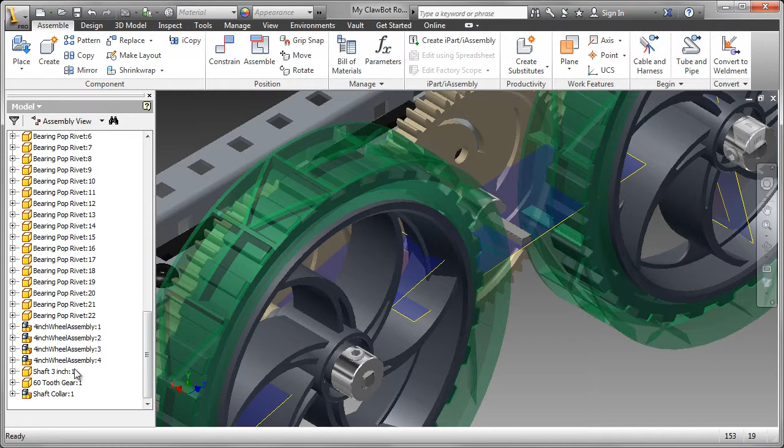Now the drivetrain is in place, I'm going to go ahead and align the gears. One of the first things I want to do, however, is just double check that the gears align properly. So I'm just going to look down in the top view, and that looks pretty good. All the gears are aligned correctly.

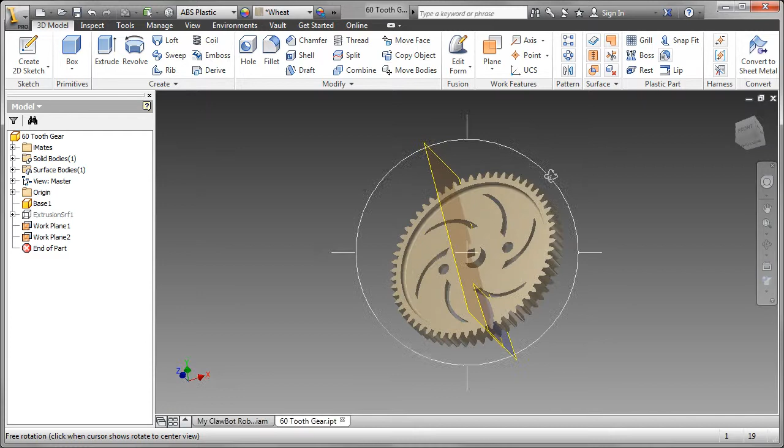Now to actually align the teeth of the gears, what I've done is added work planes to each of the gears. Here we see one. I've just opened that up so we can see a 60-tooth gear. And there's a work plane going through a tooth and through the gap between the teeth, right in the center. I'm going to use those in constraints to align the teeth correctly.

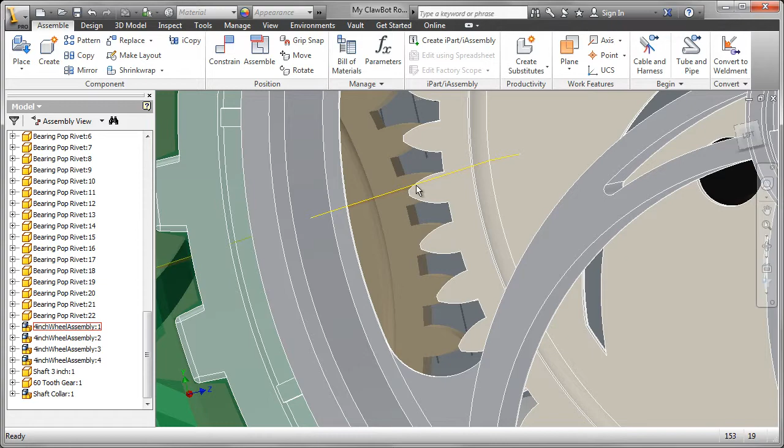So we can see the work planes on each of the gears. And I'm going to constrain those just using a mate constraint. An angle constraint would work as well. Angle constraints can sometimes be very useful, particularly for driving those constraints in animations.

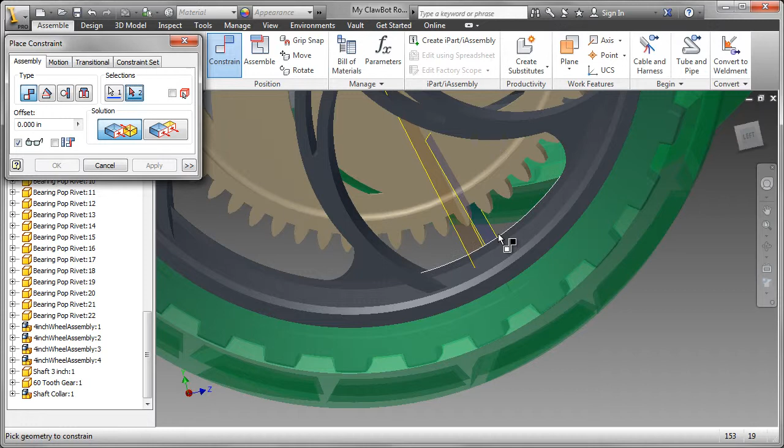So just rotate that around so you can see it. And we'll get that one. So select the first one, and then select the second one. So you're selecting a long work plane and then a short work plane, and that should align the teeth of the gears correctly. Apply that.

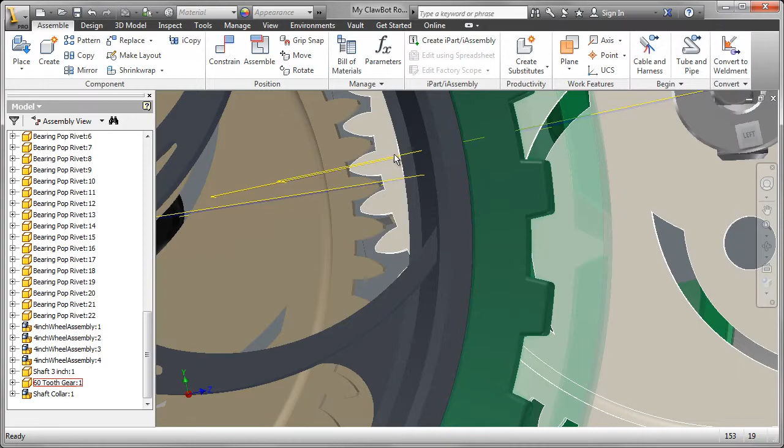Go and do the same on the other one. Just rotate that around. So again, we'll select one of the long work planes, and then select the shorter one. We click on apply. We'll just cancel out of that and check it, and you can see that the teeth now align correctly. So when we rotate these, they will work properly.

The next thing to do then is check that... they don't rotate. Wonder why that is. Well, we've just applied a couple of constraints that mate those together. So to allow the motion to continue, I'm going to go into that 60-tooth gear, select the two constraints, and suppress them. Sometimes useful to rename those from mate 4 and 5 to something useful, just to remind you that that's the two constraints that were holding the gears in place.

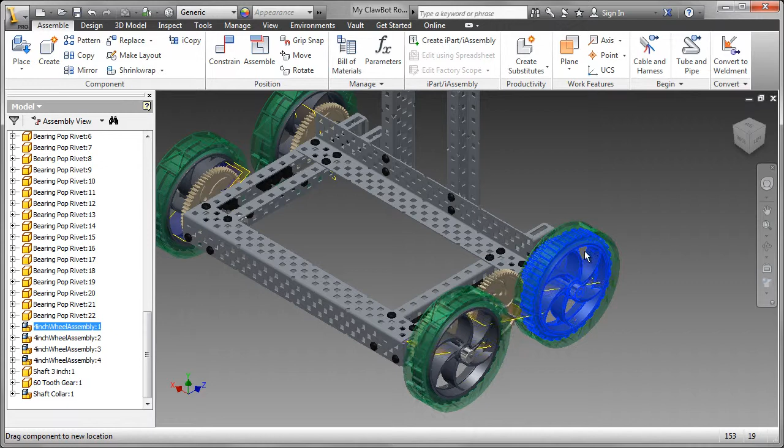So I've started rotating the gears, and I want to check that they're rotating properly. To check that the gears are rotating properly, I'm just going to look at a side view. And, well, it looks kind of okay on the wheels, but I don't think the gears are meshing properly together. They're rotating the wrong way.

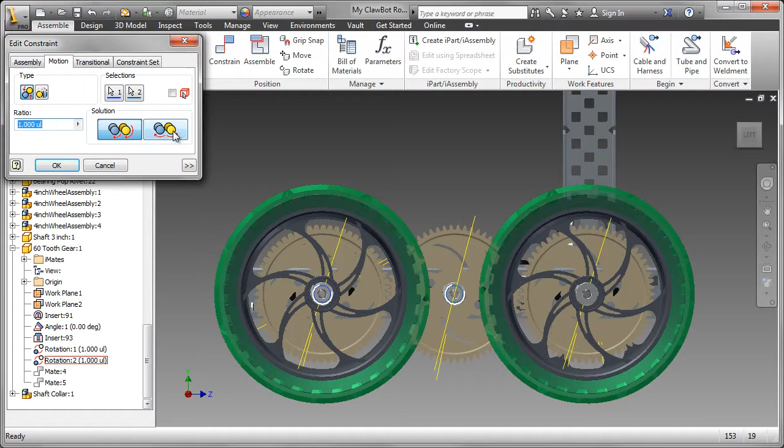So if you recall, when I created those rotation constraints, I just selected the default solution. It looks as if I should have selected that other solution. So let's go ahead and change those. There we are. Now let's rotate that counterclockwise. The middle gear's rotating clockwise, and the other one's counterclockwise. So that's good. Of course, we have to do that workflow for the gears on the other side of the robot as well.